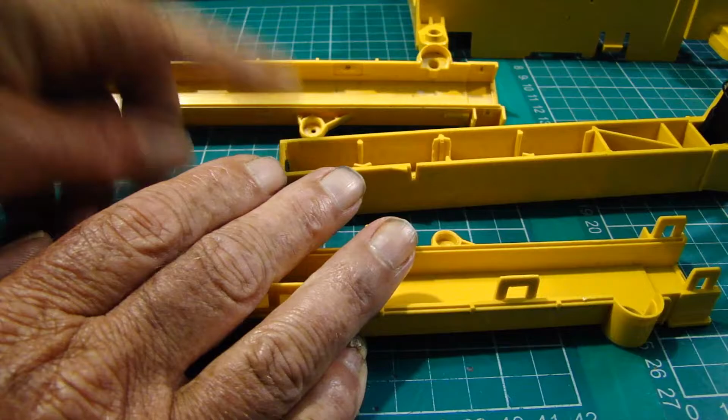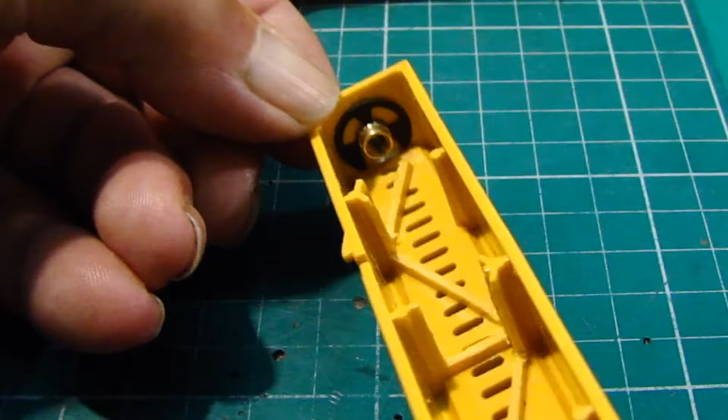I've figured on pushing and pulling this in and out right on the very end. So what I've done is I've drilled and fitted an M4 insert. You can actually push that into the end, and then as an extra precaution I've locked it into position using an E-clip. So that sits nicely in the end, and I'm going to use a

500 RPM output shaft N20 motor, M4 thread. So that will screw in and out of that insert to give us our 100 millimeters of travel. It won't be 100, it'll be just under 100 looking at this scale here, but that should be enough to extend the boom out sufficiently.

The boom itself has got a stop end guide on it here, which locates in the left hand side channel, so that in this section here there's a channel that runs all the way to the end, so the little lug on there will end up there, so it's given us a little bit of an overlap for it to hang on to. So the plan is that the motor will push and pull the arm through its travel, so about 100 millimeters thereabouts.

So we're moving on to the next part now, which is part of the cable management system, and also part of the cable retract system. So the very latest at the moment is I've cleaned out this channel completely up to this end wall, and I'm going to use that as a cable retainer. So I've made this little bracket up, and that slots onto that end wall like so, and then is held in with a countersunk M1.6 by 10 screw to keep that in place.

And it also doubles up as a spring anchor, so there will be an eyelet or an end eye for a spring, which is part of the retraction system. I've threaded the cables through the bracket, I guess you'd call it, through there to bunch the wires up together ready to turn the corner. So that will be the next in line. So what I've got to do is thread this eyelet up through to the top of the heat shrink tubing.

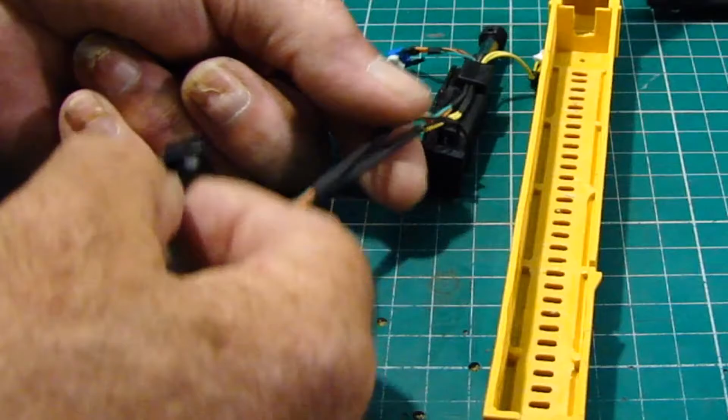So I've got the motor fixed in position up the top, and I've also got the screw in for the bracket. So that's how the cable will end up being routed. There's also a spring which will be used further down the line, and that has got to hook over that turret on the end.

Okay, so I've completed the heat shrink tubing. I've got an insert, so I've just printed that off, and that will actually sit inside and hold those wires into the profiles. We've got 7 wires coming through this bulkhead fitting, and then from there it's separated down each side of the track. So we've got 4 wires coming down on the left, so there's 3 wires coming off the pot and 1 motor wire, and on the right hand side we've got the 2 solenoid wires and the other motor.